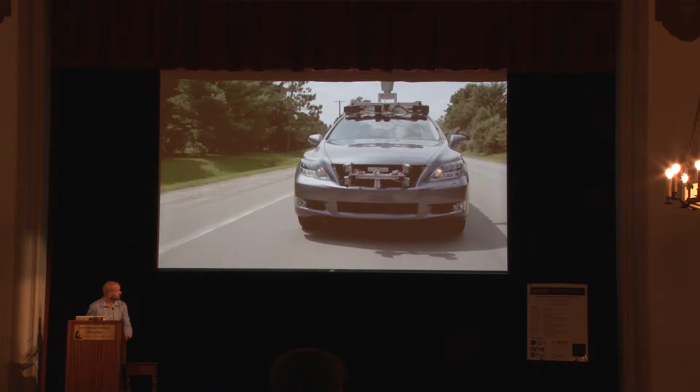We're not getting sound. What are you looking for? We're not getting sound. Oh, sound. It's not going through the speakers, it's coming out of here. Let's just skip. Okay. Sorry, last group didn't need sound. Do you want to start over? Would you please?

Toyota, and TRI in particular, has a somewhat different approach to the development of autonomous cars than many of the other developers. Most developers are focusing on the chauffeur mode of autonomous driving. In the case of the chauffeur mode, it truly is in many ways like being on a train or a bus. TRI's approach is actually to look at a blend of the chauffeur mode and what we call guardian angel mode.

Here, you drive the car, and you continue to do so, and the autonomy is there to save you from harm. Being autonomous does not mean you have to give up the fun of driving. In fact, if you do it the right way, if you use guardian angel mode, being autonomous can actually make it more fun to drive.

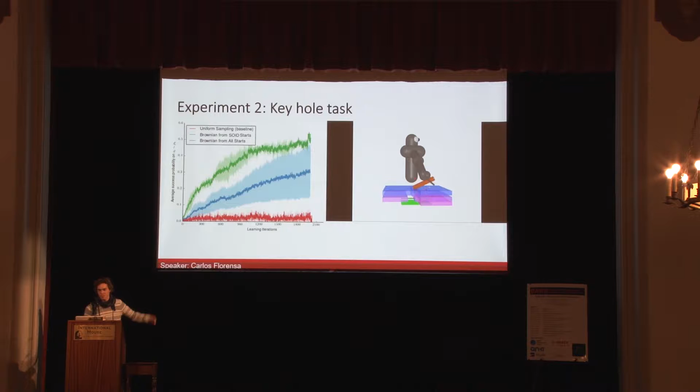Here we can see that our algorithm matches the start distribution to the performance of the policy, providing the best learning signal. And if you want to see cool locomotion and manipulation videos, please come to the poster. Thank you.

Hi everyone, my name is Prashant. I work with Koushil Sreenath.

As he mentioned in his talk in the morning session, our lab also works with aerial manipulation, which involves load delivery and transportation. These load delivery transportation systems are highly underactuated and have very high degrees of freedom, so it's difficult to control them using Euler angles and local variables.

So we use geometric control in our systems. And in our geometric control, we use a rotation matrix to represent our attitude controller.

Interesting work has been done in this geometric control. Various controllers have been shown to exhibit global exponential stability. However, these controllers require very accurate model estimation and system parameters. In the presence of disturbances, these controllers are shown to exhibit large tracking errors.

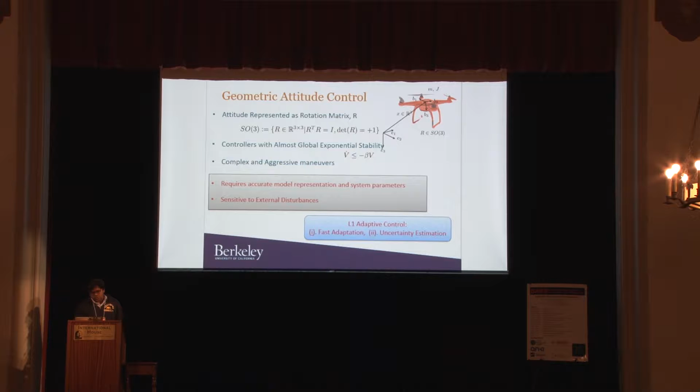So to avoid that, we propose a model L1 adaptive controller. We chose the L1 adaptive controller because of its fast adaptation.

In our L1 controller, we have two models: one for the quadrotor with disturbance, and a reference model without uncertainty. We develop errors on the manifolds and then propose the adaptation law. Then using Lyapunov analysis, we show that it exhibits exponential convergence.

Thank you for your time.

Hi, my name is Ayush. Today I'm going to be talking about safe bipedal navigation using control barrier functions.

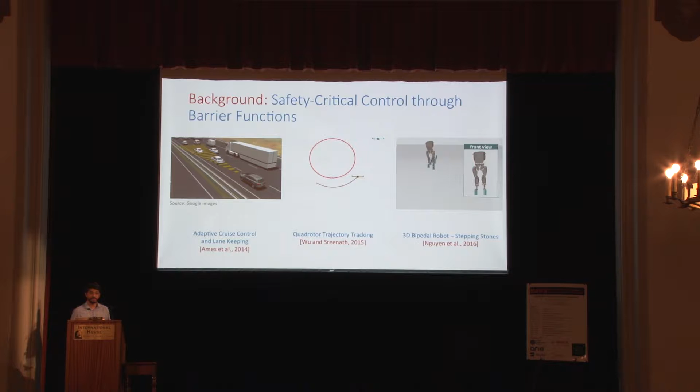Control barrier function-based controllers have gained significant success in a wide variety of systems, including legged robots that we've seen in one of the talks this morning.

Now, the key problem here involves safety as well as stability constraints, which are enforced through control Lyapunov and control barrier functions, and this is implemented through a quadratic program in real time.

In this work, we look at discrete-time realizations of these functions because our navigation problem formulation is inherently discrete. We also address some of the computational challenges associated with this.

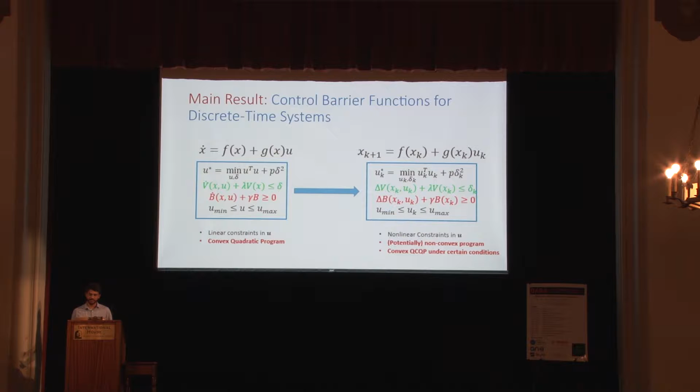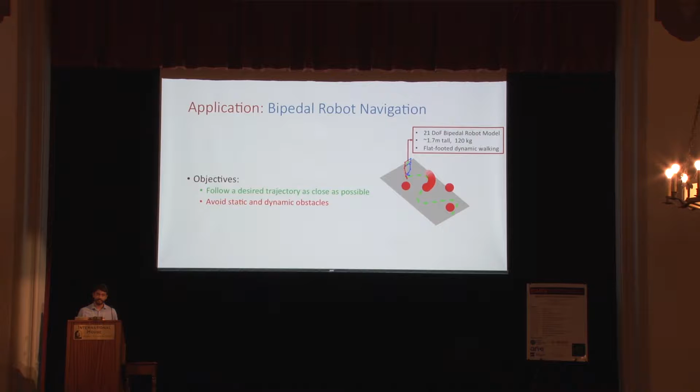Our control objectives here are to follow a desired trajectory as closely as possible and to avoid static or dynamic obstacles. So we build a controller at multiple levels.

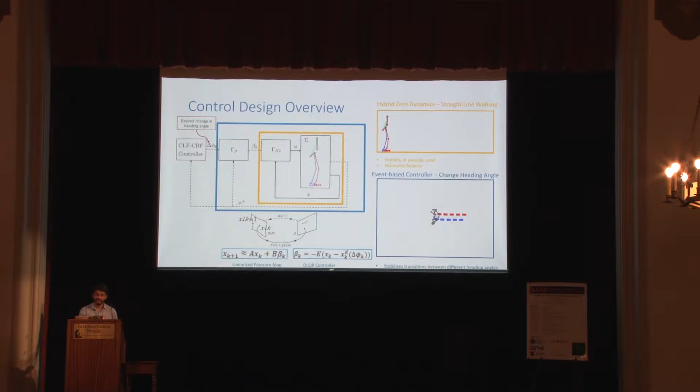At the innermost level are controllers that take into account the full nonlinear model and hybrid dynamics. At the outermost level is our barrier function-based controller that avoids obstacles and also follows the trajectory.

And these are some simulation results. We can avoid static or dynamic obstacles, and we can do this without having to plan footsteps explicitly. Thank you.

Hi, I'm Alex Lee, and I'll talk about how to use visual models for manipulation. Humans can accomplish very complex tasks because they have very good physical understanding of how objects in an environment will move as a consequence of their actions.

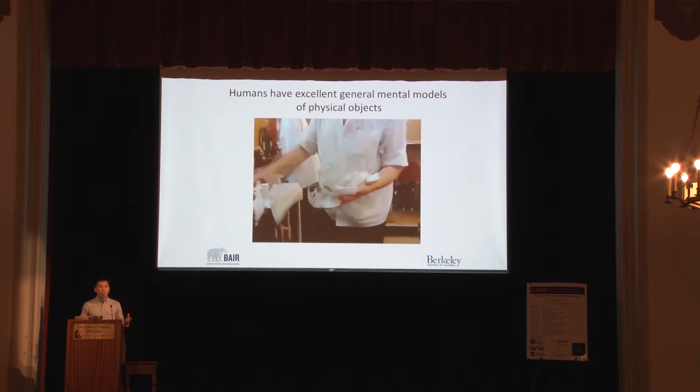Well, we can learn a video prediction model that, conditioned on the current frame and a sequence of actions, can predict a future sequence of observations.

Once you have such models, then we can say, conditioned on a particular pixel location in the image, we can similarly run this through the model and predict the distribution of pixel locations conditioned on the given initial pixel location and the sequence of actions.

Once we have such models of distributions of pixel locations in the future, we can then optimize over sequences of actions and minimize the expected distance to a particular goal.

So an example is, let's say we want to move here, and that's the resulting policy. This would also work for goals where we have a model able to handle multiple objects.

So here, the task. In this task, we need to move the objects apart.

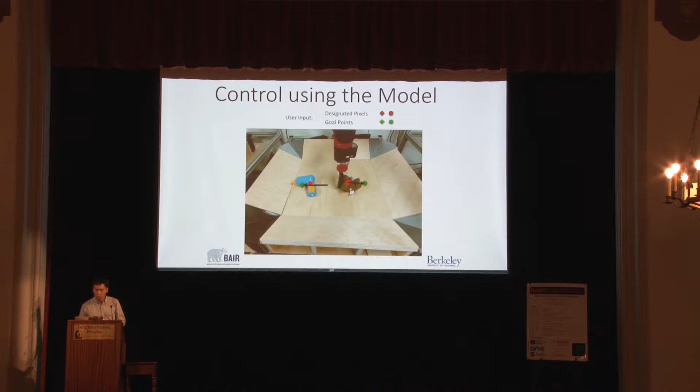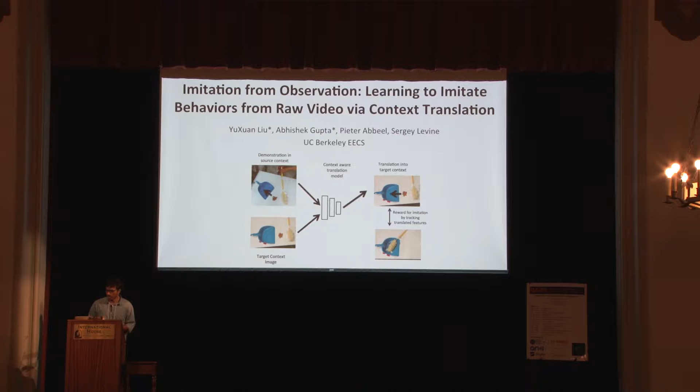Hi everyone, my name is Abhishek, and I'm here to talk about imitation from observation. Our goal is to get robots to learn things in the real world, and rewards are hard to specify.

So what we're going to do is use imitation learning where we have expert demonstrations. Typically, expert demonstrations assume you have state action pairs in the embodiment of the robot, and you get these through kinesthetic teaching or teleoperation. However, humans and animals don't often learn this way.

They learn by observing other people, just by visual cues. So we want to see if we can do the same kind of thing in robots, where we can just look at videos of humans or other robots performing scenes in perhaps different contexts, different viewpoints, different environments, different colors of the objects, different lighting, and so on. And we want to see if we can get robots to learn just from these cues.

So to do this, we have a method which learns a model that translates expert behavior from one context to another. Let's say we learned how to do something in one viewpoint, we learn a model which learns how to translate it into another viewpoint.

Now, given a new environment, if we translate the expert behavior into the new context, the robot can then use the translated behavior and a learned feature space to do this. All right, my time's up. Thank you.

Hi, I'm Daryl Dio from the Charm Lab at Stanford University. During motor control, we rely heavily on vision and proprioception to make an informed estimate of our body's configuration in space. Proprioception here refers to the sense of self, and this is the information your brain gathers from your muscles and joints. In cases where there's a loss or deficit in proprioception, such as amputation here, we see reliance shift heavily towards vision.

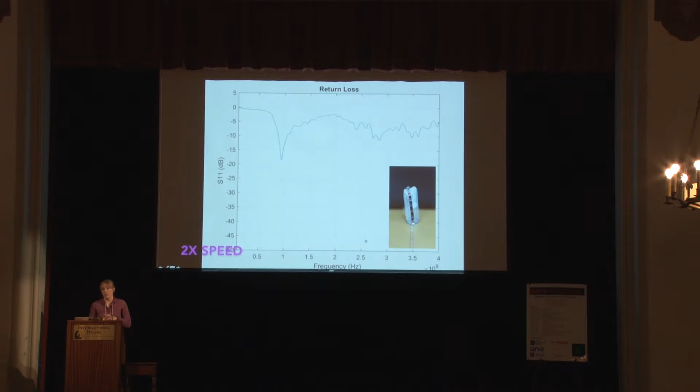We can measure the resonant frequency of our antenna using a return loss measurement. This measurement we expect for a monopole antenna will decrease as the length of our antenna increases, matching the behavior we see here. This measurement can additionally be used to form a closed-loop control on antenna frequency based on length change. So we are able to stably control to a desired resonant frequency by changing the length of our robot.

In the future, we believe that adding additional shape control can allow us to extend this model to more exotic types of antennas. By branching, we can achieve multi-conductive paths, such as a Yagi-Uda antenna shown here. And with pre-shaped forms or active actuation in the body of the robot, we can achieve a helical shape.

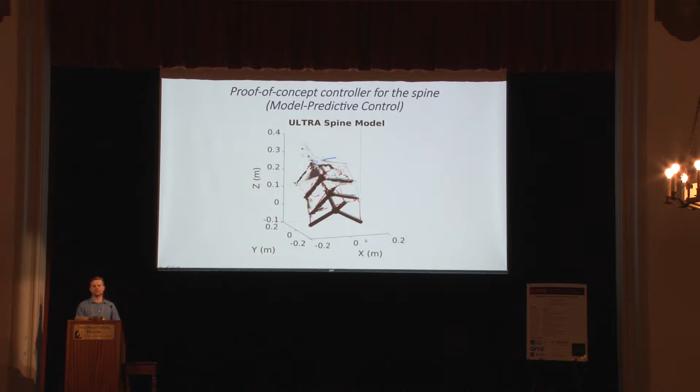We've developed some closed-loop control algorithms for control of the spine itself. By adjusting the lengths and tensions of the cables that hold the spine together in its lattice, we can track the center of mass position for each of the vertebrae.

Finally, we've also been doing a design study examining which types of spines, which shapes of these vertebrae, would actually be best for performing these kinds of bending or rotation tasks for the robot. Thanks.

Hey everyone, good afternoon. My name is Brian Cera, and like Drew, I'm from the Berkeley Emergent Space Tensegrities Research Lab. The work I'm presenting on today is on spherical tensegrity locomotion using model predictive control and imitation learning.

Tensegrity robots, to recap, are an amazing, lightweight, flexible, versatile robot constructed using rigid bodies held in a tension network of elastic elements. Tensegrity robots achieve dynamic motion by individually controlling cable lengths and rod lengths to produce this shape-shifting behavior.

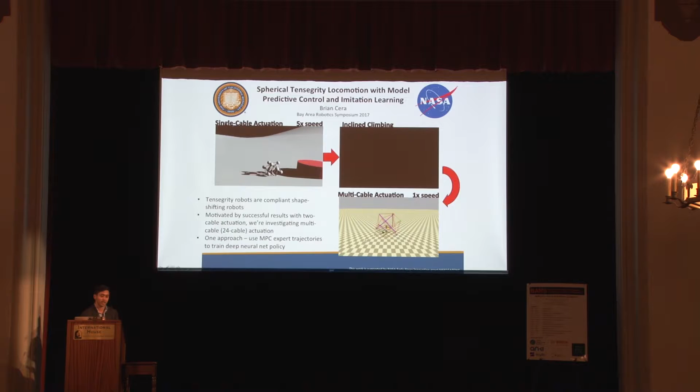But because of their coupled nonlinear dynamics and high-dimensional state and action spaces, they present a lot of interesting control problems. To achieve this periodic locomotive gait, I propose using model predictive control for simultaneous actuation of 24 cables. But because model predictive control relies on solving an optimization problem iteratively, real-time feedback control using MPC is pretty much intractable with complex tensegrity structures.

To alleviate this, I use MPC as an offline expert policy to generate optimal trajectories of state and actions, to train a neural network policy using imitation learning and supervised learning. If you're interested in hearing more, please reach out to me at the poster. Thank you.

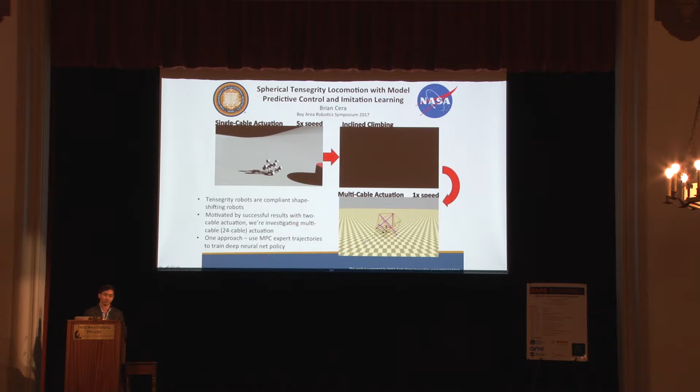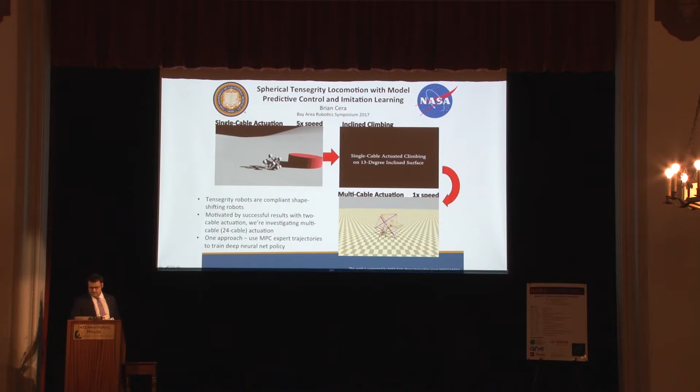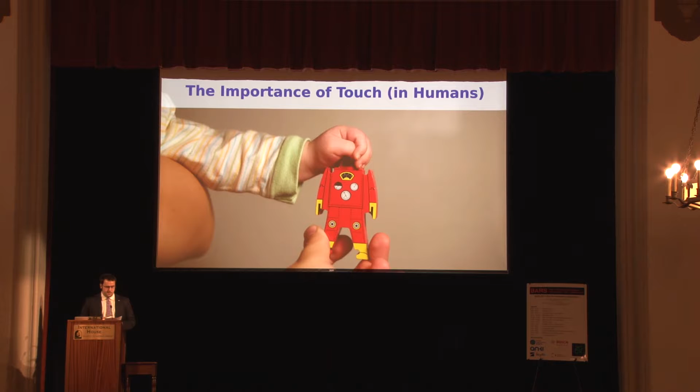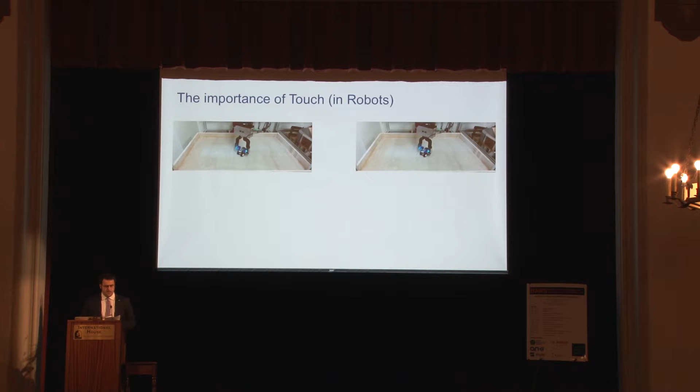My name is Roberto Calandra. In psychology, it's well understood the importance of touch in a large number of tasks, including grasping. However, state-of-the-art robot grasping relies almost exclusively on vision. Using only vision, it's difficult to predict if a grasp is going to be successful or not. Touch sensing provides a direct way to observe contact forces and helps discriminate successful grasps.

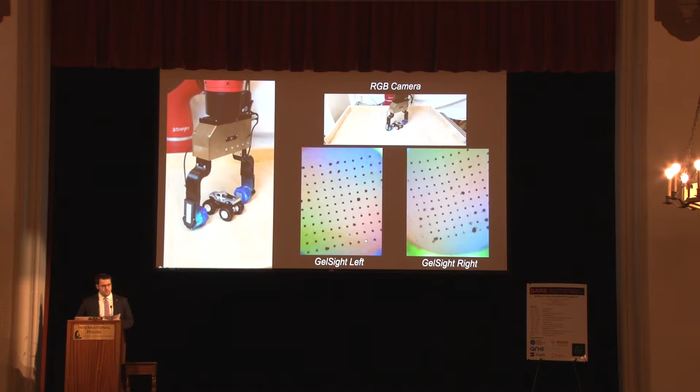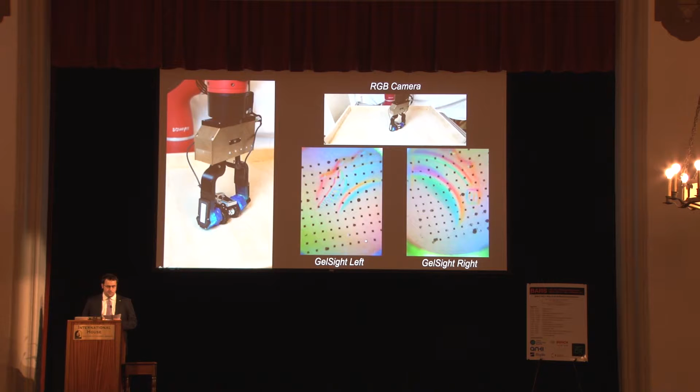In this work, we propose a novel approach based on a deep neural network capable of learning to grasp novel objects from raw visual and tactile inputs, shown here on the right side of the screen. After each grasp, our system predicts the probability of success of the current grasp, and if too low, it generates an appropriate grasp correction. This process is repeated until the grasp is predicted to be stable and the object is then lifted.

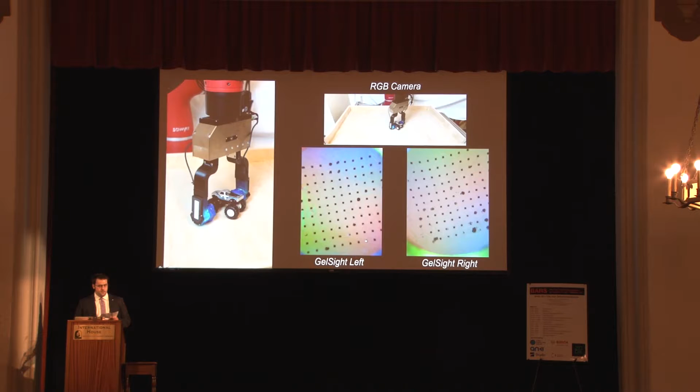Our approach does not require manual engineering of features or any characterization of the sensor. We compare against a manually engineered system and against using vision only, on a set of 11 previously unseen objects. Our approach achieved 94% grasp success, yielding a significant improvement compared to other baselines, while reducing by 50% the amount of force needed. Thank you.

Hi, everyone, I'm Will. I'm presenting today on bio-inspired grippers for natural curved surface perching, and I'm working as part of the Lentink lab and the Biomimetics and Dexterous Manipulation Lab at Stanford.

Our goal is to design attachment mechanisms that can attach to irregular surfaces, varying in both surface geometry and texture. If we look to animals, they've got this figured out, especially on trees, and even across a wide range of scales. One thing you can notice is that a lot of them use opposed gripping techniques, where they grab from opposing sides of their body. So we made a simple model to get at this, and here we have an opposed gripper on a circular rough surface.

One aspect of the design we're especially interested in is the preload, so how much do you squeeze the surface before you exert the maximum external load.

I won't go too much into the model here, but some basic, very intuitive takeaways are: one, it's important that the claws have a large travel in the normal direction. Two, on a relatively flat surface, if the contact point is not deep around the asperity, the shear preload will cause the contact point to slip. And as you can grab farther around the asperity, your preload is dominated by the normal preload.

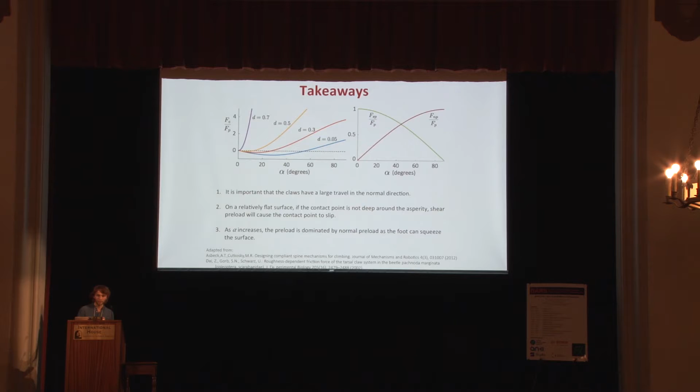So we made a mechanism that illustrates this concept, and if you'd like to learn more, please come to the poster. Thank you.

Hello, I'm Wilson. I'm also from the BDML at Stanford, and my poster is about the design of a spiny hand end effector to achieve human-scale robot climbing, specifically on the RoboSimian platform.

So we draw our inspiration from several different sources, including past research, human climbing tools like what regular recreational climbers use, as well as biology.

The underlying technology behind the design we're focusing on right now is the idea of these linearly constrained spines, which basically sacrifice a little bit of efficiency per unit spine to instead achieve a much higher density of spines per unit area, which results overall in a much higher total potential shear stress for a given spine tile.

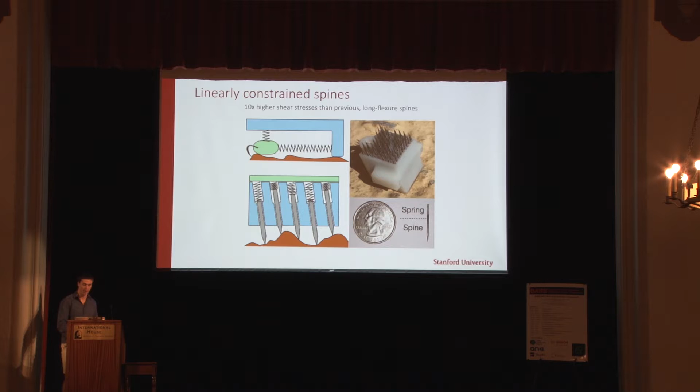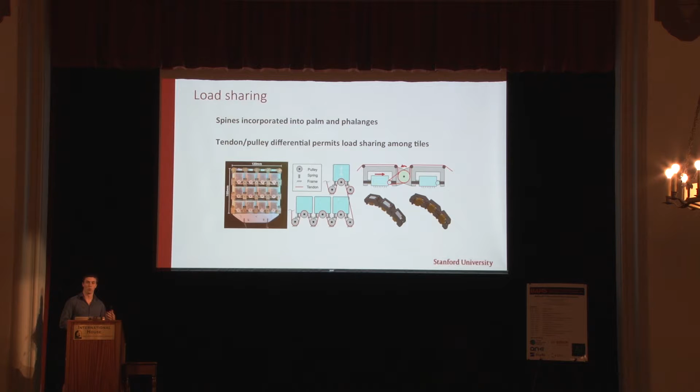Going up a scale, these are then integrated into a tendon-based load-sharing mechanism across the palm and phalanges of the robotic hand to ensure that one single tile does not take the entire load.

And these are then integrated together into an anthropomorphic hand design, as you can see here, which seeks to emulate human-based climbing grips such as the crimp, sloper, pinch, etc., but with the increased potential of the spine tiles.

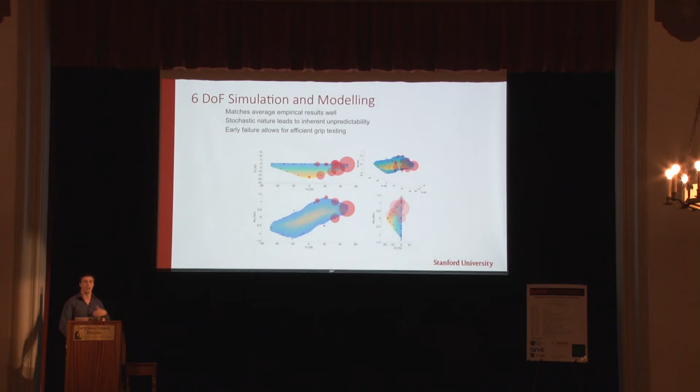And I'm basically out of time. There's also a 6 DoF model which seeks to predict this. Come see me if you want to talk about it later.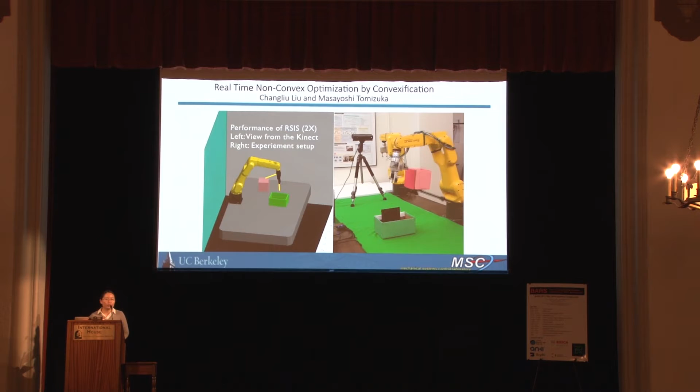Hello everyone, I'm Te Tang from UC Berkeley. My poster is about a new registration method called structure-preserved registration.

Non-rigid registration has been developed for many years to smoothly transform the source points to map to the template points. We can also use it in robotics to find the similarity between scenarios and transform paths.

However, traditional non-rigid registration usually only considers the global shape while dismissing the local structure, which results in a local structure damaged registration result.

To deal with this problem, we proposed structure-preserved registration. Basically, we introduced manifold learning to model and extract the local structure, and then we try to maintain it by designing a regularization term during registration.

And we apply this method in the rope manipulation experiment. During training, humans teach several demonstration patterns. Then during the test, our algorithm can map our current randomly placed shape to one of the patterns.

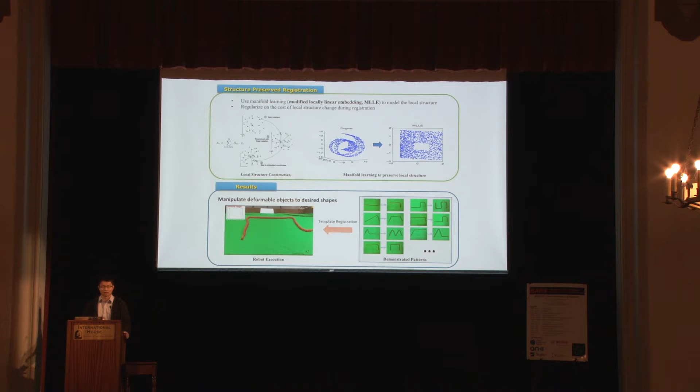Hi, I'm Daniel, and I'm working with David Camarillo on automated positioning of oocytes in in vitro fertilization. One task embryologists have to deal with is actually positioning and orienting embryos or oocytes.

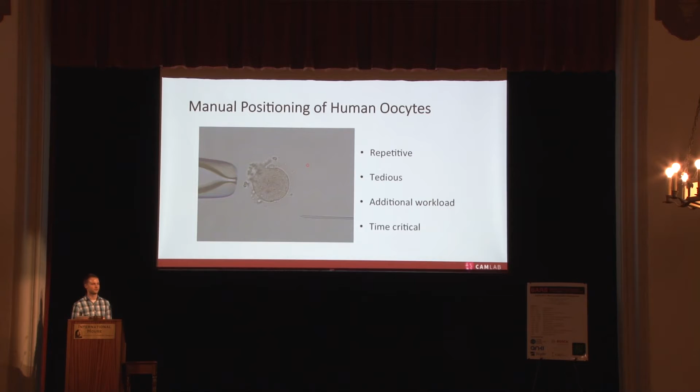This task is very repetitive and tedious, and it's additional workload for them, so they cannot focus on more complex tasks. It's also very time critical because every minute out of the incubator might influence how the cell develops later.

One observation they made is when an oocyte is attached to a pipette and they tap the pipette tip, this actually causes rotation in the oocyte and reorients it.

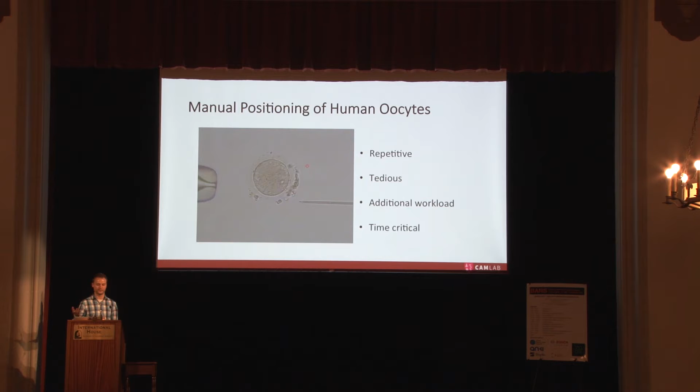So we wanted to know if we can reproduce that. We attached a small motor to the pipette holder to vibrate the pipette tip.

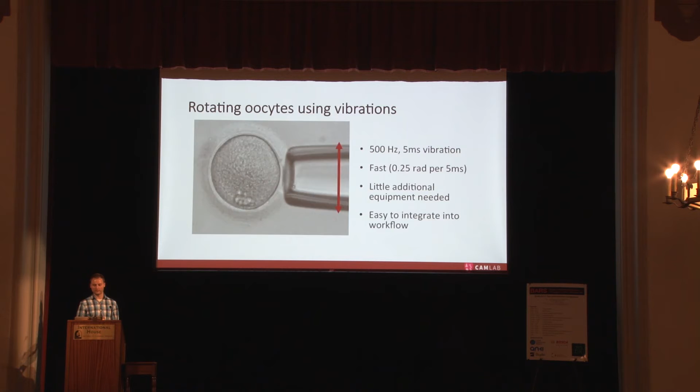As you can see, by only inducing vibrations on the pipette, you can actually orient the oocyte or the embryo. Then we can also apply some computer vision techniques to track features on the oocyte, like the polar body here, to know in which orientation the oocyte is and track the orientation.

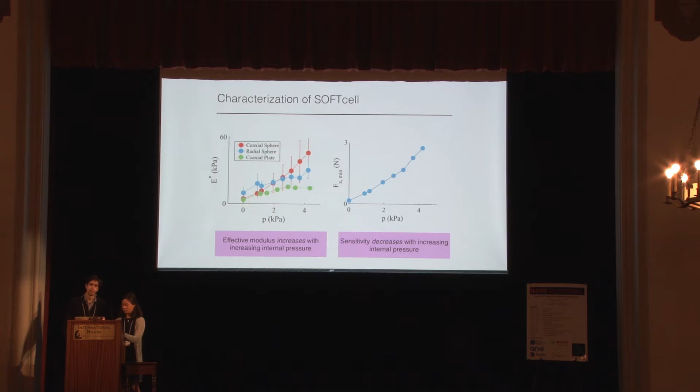Through our controlled characterization experiments, we demonstrate programmable effective modulus and also sensing of SOFTcell. We conclude with a set of task demonstrations illustrating reactive control under two sensing actuation regimes.

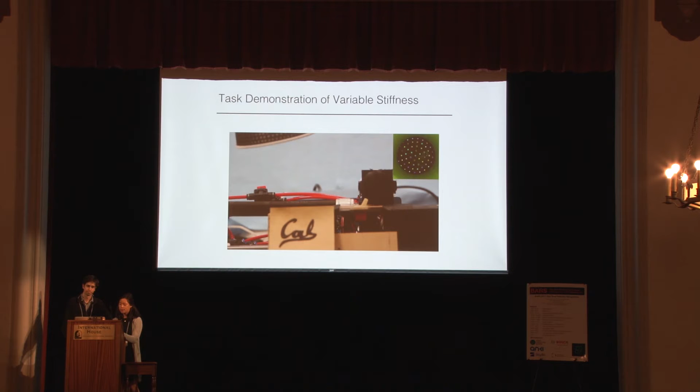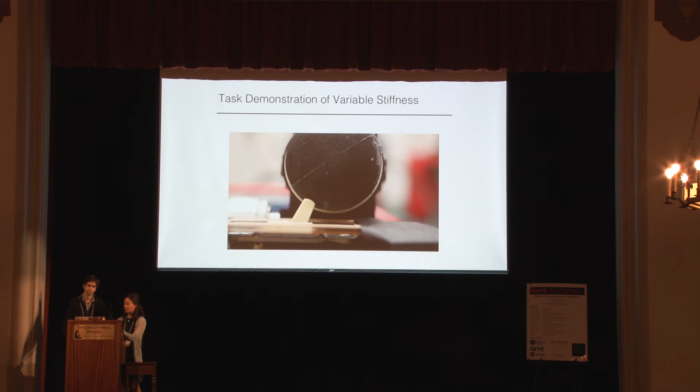In its passive state, the sensor can detect the slightest touch with minimal disturbance through conformal sensing. Then, the device switches to its actuation state to exert larger moments on the environment, such as in this light switch task. Thank you to everyone involved, and come see our poster for more.

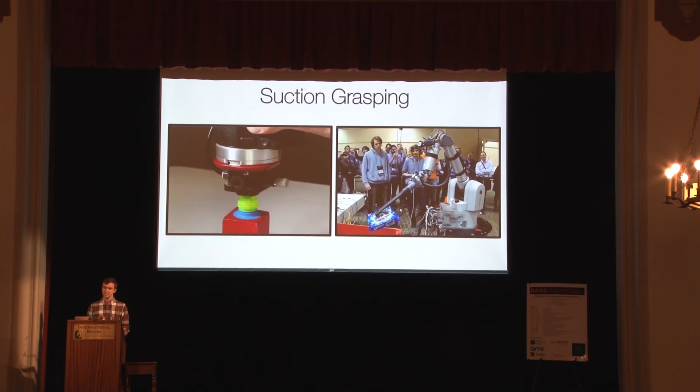Suction grasping is ubiquitous in industry due to its improved reachability, but current planning methods are simple heuristics for the most part. We propose a novel analytic metric for suction grasp that consists of two parts.

First, we use a spring-based approximation of the cup's geometry to determine whether a tight seal can be formed against the target object. Then we use a novel contact wrench basis in order to analyze the grasp's ability to resist the gravitational wrench during contact.

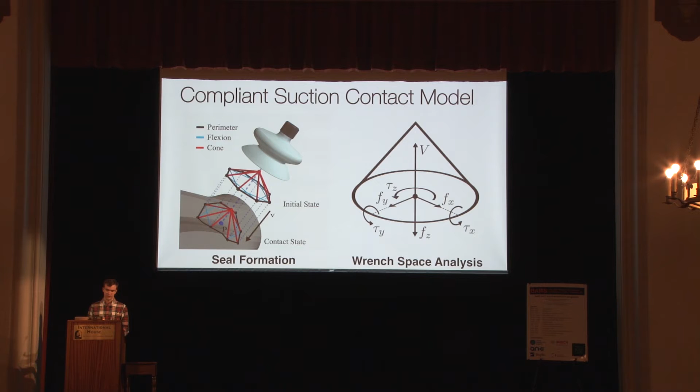To generate training data, we sample grasp points on CAD models and integrate our analytic metric across perturbations to produce a robustness score for each grasp.

Then for each grasp, we render a cropped depth image centered on the grasp target. A cropped image, gripper approach angle, and robustness score form a single training data point.

We use 1,500 CAD models to generate over 2.8 million data points, which are then used to train a CNN to predict grasp robustness from a cropped, rotated depth image and an approach angle.

During planning, we sample potential grasp points in a depth image and use a CNN to score each sample. The highest rated grasp is then executed.

We divided 55 test objects into 3 classes based on difficulty and evaluated our method against several common heuristics in over 1,700 trials. If you'd like to see a little bit more about the results, come see my poster. Thank you.

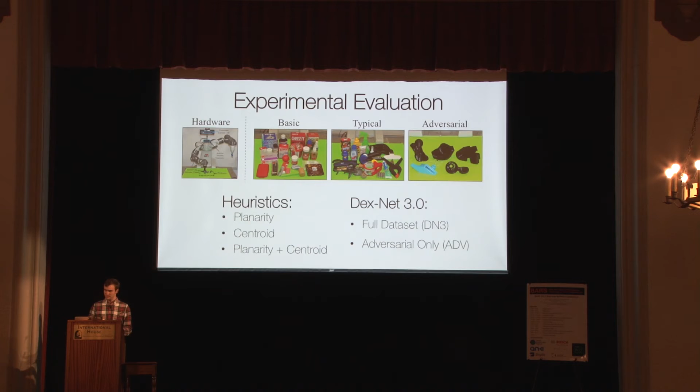Our lab works on taking biological insight from biologists like our great speaker, Bob Full, and then translating those into applications on small-scale robots. Small-scale robots are really exciting because they've got a bunch of benefits like fitting into small spaces, they can be lower cost, and they're inherently very sturdy, so you can throw them at walls or drop them off cliffs.

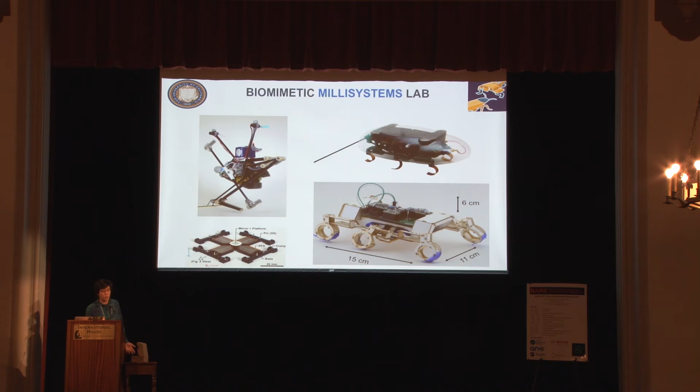We've got a bunch of different small robotic platforms that we work on, including a series of hexapedal crawlers, a monopedal jumping robot, and small-scale actuators that can work on robots of this size.

With these, we've worked on things like trying to imbue these small robots with very high performance, jumping very high or running very fast, shown on the left.

We've also tried to get these robots to be able to correct things if they fall over or if they run into issues. And finally, if we have lots of small robots that are low cost, we can have many of them working in a team to overcome obstacles that a single robot wouldn't be able to overcome itself. All right, thanks very much.

Hi, I'm Jesse Levinson. I'm the co-founder and CTO of Zoox. We're building a fully autonomous fleet of ground-up electric, bidirectional, symmetrical vehicles to move people around cities.

No steering wheel. I have not the ability to show you our vehicle, but I can talk about a bit of the tech we're designing. So this is our 3D mapping pipeline. We automatically build large-scale 3D maps, removing dynamic obstacles. We also do deep semantic classification of these maps automatically and understand the whole scene.

We have a simulator with a fully 3D environment accurate to within centimeters, where we can run our entire AI stack virtually. We simulate all the sensor data.

So here we're simulating radar data. We have metallic surface properties, and we understand radar returns on those objects. We have a full realistic LiDAR simulator, so we understand the way LiDAR responds to different angles and surfaces. We can simulate different weather conditions like fog, which we have fairly often in San Francisco.

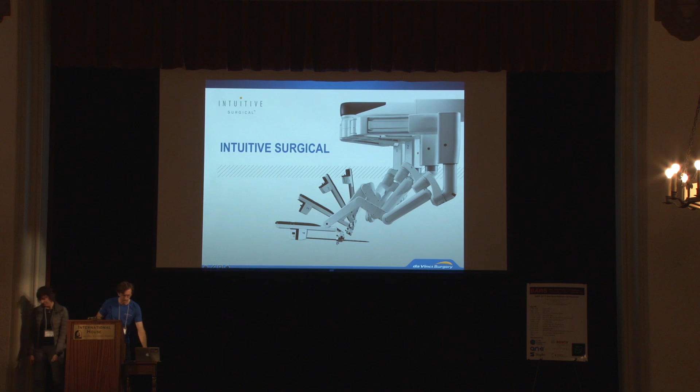Hi, I'm back. We have slides, so in case it wasn't clear what imaginary things I was gesticulating at, now you get to see. You don't have to use your imagination. So Intuitive Surgical makes the Da Vinci surgical robot.

Why do we need a robot to do surgery? This is why. This is a handheld tool, and there's a little grabber on the front, a little squeezer on the back. This is what surgeons use if they don't have robots.

It's only 4 degrees of freedom. There's no wrist. You're constrained to enter through a single point of access in the patient, and so we think we can do better. That's this.

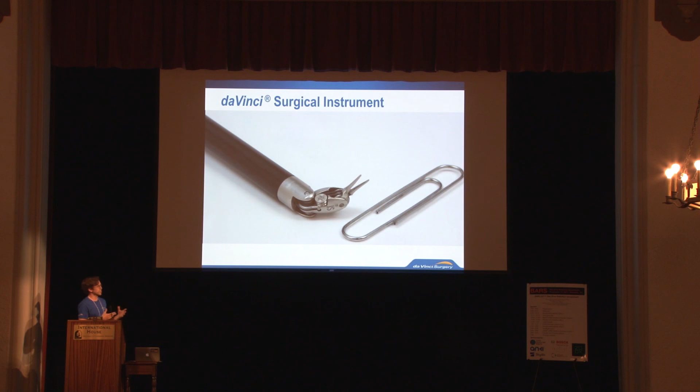This is the instrument that we sell. It has a wrist on it. Obviously, it's very small. And so this gives you 6 degrees of freedom inside the patient.

But how do you control that? Because this is not going to be that great for controlling a 3 degree of freedom wrist. So that's why we have a robot.

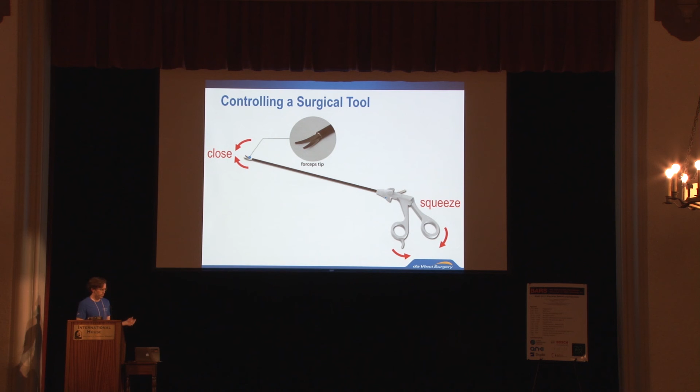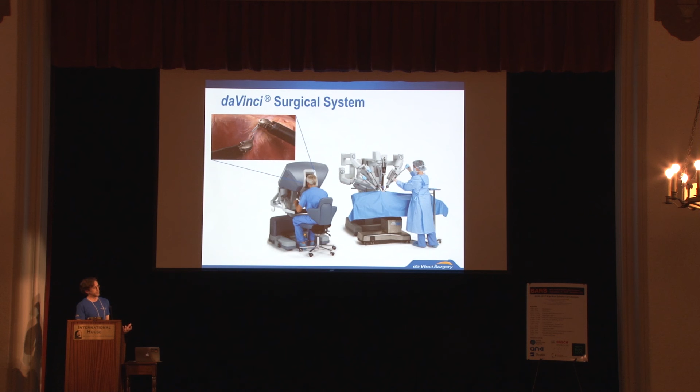Here's a picture. The surgeon is sitting at a console, with a stereoscopic view of the robot hands inside the body, doing exactly what the surgeon's hands are doing in the console. This makes difficult surgeries easy. It makes impossible surgeries possible.

Because of that, 84% of hysterectomies for malignant conditions, and 86% of prostatectomies in the US, are done using this robot. There are over 4,000 robots in the world in 64 different countries, and we've touched the lives of over 4 million patients.